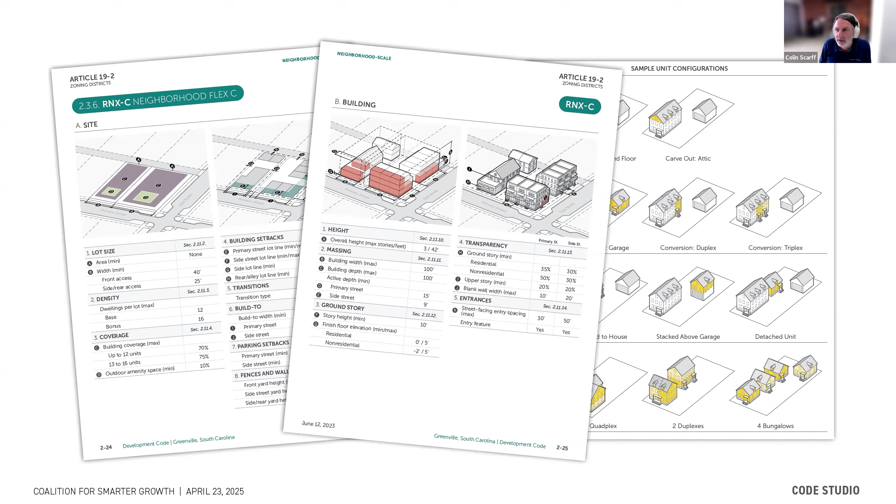So just a little bit about what we're going to talk about today. We're going to touch on what is a form-based code in today's world? Why do cities need better zoning? What is the right approach to zoning? And then after we've heard all this, where do we go from here? What are the next steps?

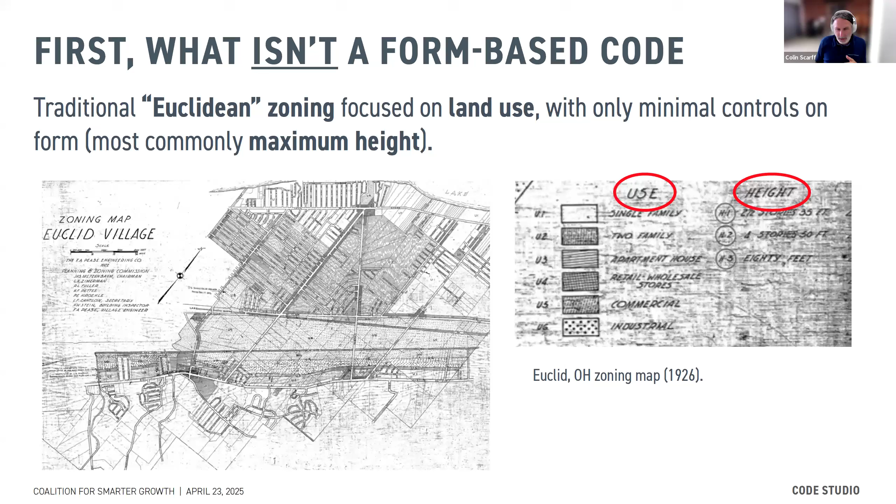So what is a form-based code in today's world? So, really, what isn't a form-based code, right? Traditional Euclidean zoning focused on land use, the separation of land uses, with really no or minimal controls on what we might call form, really focused on separating uses from one another. Did that work? Has that worked? I guess that's a debatable conversation.

I think you have these amorphous standards associated with Euclidean zoning, FAR, units per acre as it pertains to residential density. Parking requirements aren't very scientific. They're all intended to control negative impacts. But I think at times they've resulted in unintended and undesirable outcomes.

So what is the future of zoning? I think the separation of uses isn't working. Zoning hasn't focused enough on built outcomes. I think there's been a real push, maybe in the last 20 years or so, to move away from Euclidean-based zoning and focus more on built outcomes. And so more and more communities, more and more cities are looking for a different approach to zoning, one that regulates form and tries to restore traditional patterns of urbanism.

So, is it form-based code or is it just better zoning? I think that's the question that we've been asking ourselves over the years. Euclidean and form-based zoning are part of a spectrum with a wide range of possibilities in between.

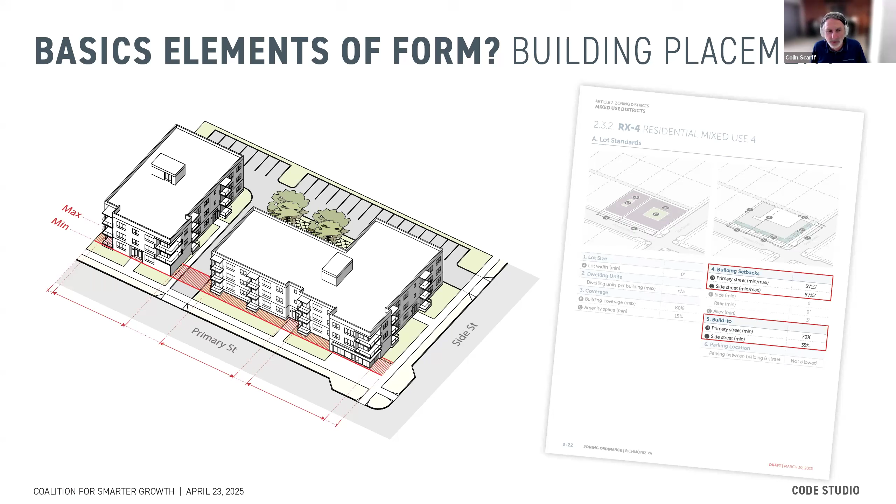And so just quickly, what are the basic elements of form that we should be looking at and regulating? Historically, we've had things like minimum setbacks, right? Where buildings are set back from the street. So one approach to form now is to have build-to lines to pull buildings up to the street, so that there's not parking between the building and the street.

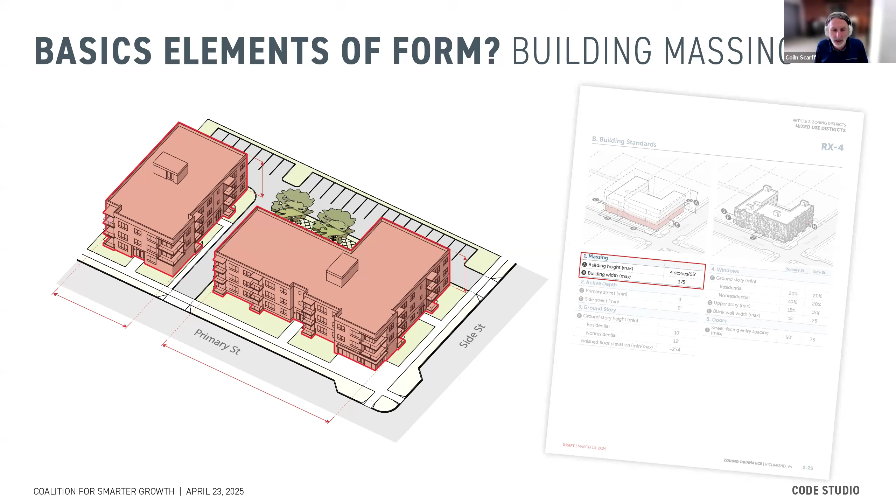We are looking at things like height of buildings, so vertical massing, and we are looking at horizontal massing, right? Because those are things that we might care about. How tall are buildings? How wide are buildings? Do they feel human scaled? Are they pedestrian oriented? Are things that we now care about.

So it's one thing to pull buildings up to the street, but what we've got to do when we're pulling buildings up to the street is we've got to make sure there's active facades up at the street, right? So we're regulating things like the minimum and maximum amount of transparency on building facades, making sure the floor heights are appropriate, making sure there's no large blank walls up at the street.

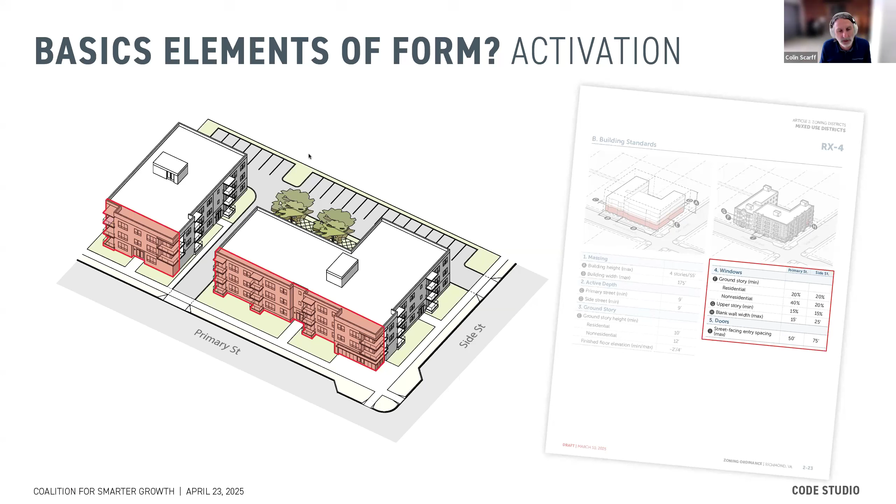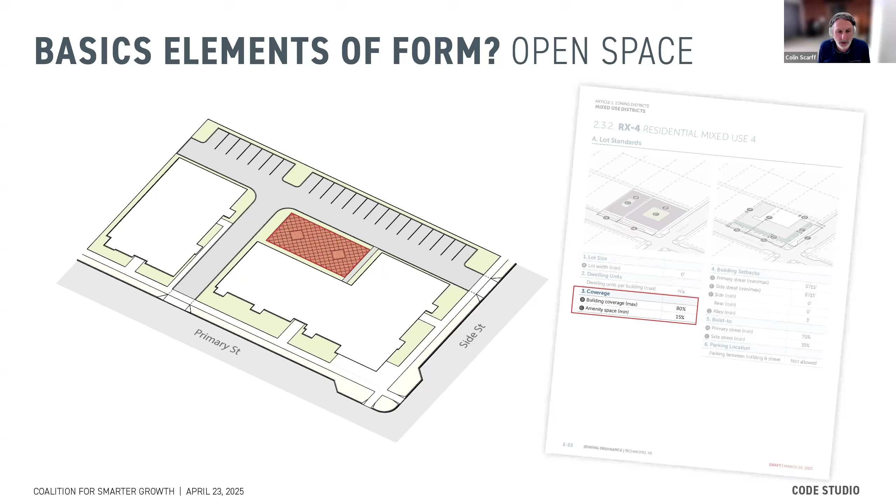And then most importantly, we're making sure there's building entrances up at the street. There's nothing worse than pulling buildings up to the street and then having no reason for anybody to be up at the street. So you've got to have those entrances and entrance spacing along the street front. And then making sure we've got open space, right? We've got to have outdoor areas for places for people to be, for people to congregate, to enjoy the outside air.

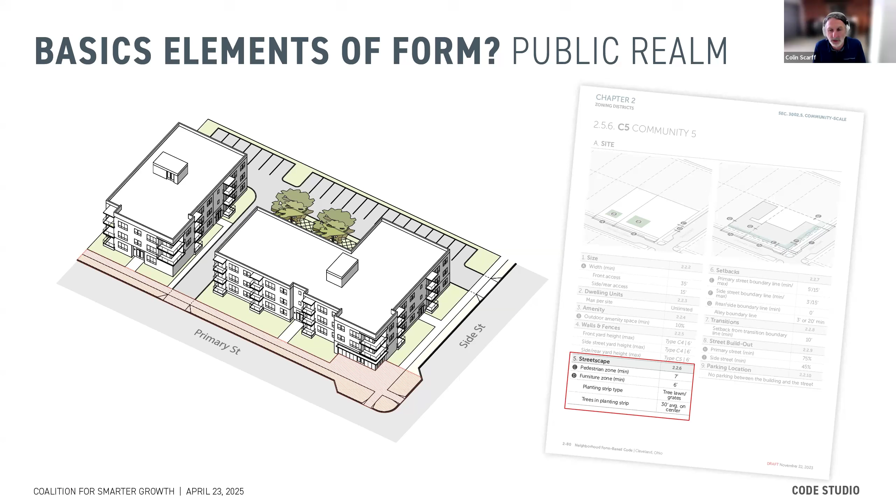And then this is kind of where the line gets blurred between zoning and form-based coding, is the public realm. Oftentimes we're looking just at zoning projects, which means we're really not looking on the public side of things. We are really focused on private property. And so trying to blur that line between the public and private, and at least making sure that you're getting appropriate streetscape requirements. So you're getting appropriate width sidewalks and appropriate width tree planting areas, and that you're getting trees between the buildings and the street to enhance that pedestrian environment.

And so why do our cities need better zoning? So I'm going to pass it over to Rene, and he's going to talk to you a little bit about this question number 2. Thanks, Colin. Next slide. So I'm going to talk to you about a couple of the big issues. These are not exhaustive, but just some of the main reasons why we need zoning and why zoning in some ways hasn't worked, and reasons why zoning could be better and how it could be better. So thinking about all those questions together.

And so, how did that happen? How did we, through all this sort of regulation and so forth that we have, produce outcomes that are this dissatisfactory? And so, thinking about some of that, badly crafted zoning is some of the reasons behind this. It's produced in a lot of places a poor quality of life in cities and suburbs and towns. And what are some of the things about that are bad? We touched on a few of them already. Rigid separation of uses through Euclidean zoning is a traditional thing that's been criticized for a long time, but still happens in a lot of places. And then aside from that, poorly regulated form. So either form not being regulated at all, or being regulated in ways that are negative in terms of the impact. Next slide.

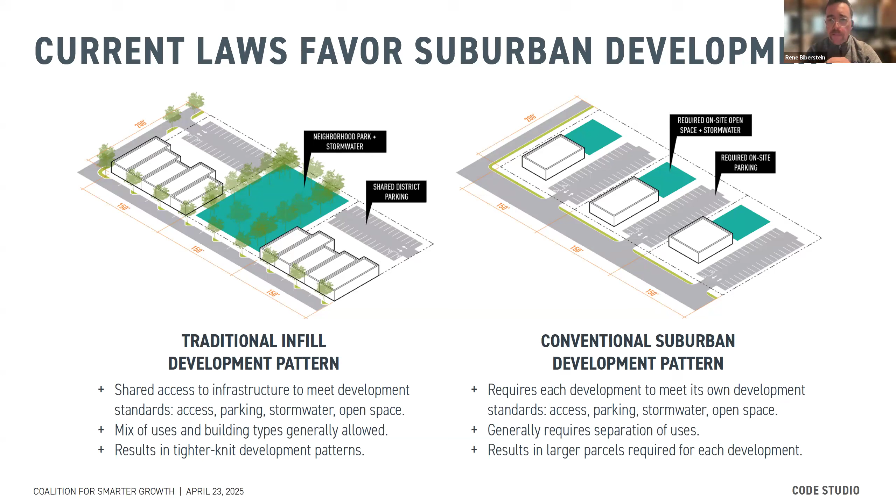So when you take the thing on the right and you try to impose it back on the left, it produces a really kind of a nasty mismatch. Next slide, please.

And another image is just having that happen in form. Left-hand side, a traditional pre-World War II development pattern of a main street, the more suburban development pattern. And then if you try to impose that suburban style of zoning on the urban area, you start getting a kind of a weird mismatch of things where you're effectively kind of forcing new development. When something gets replaced, where there's infill, you're forcing it to follow the suburban approach. Next slide.

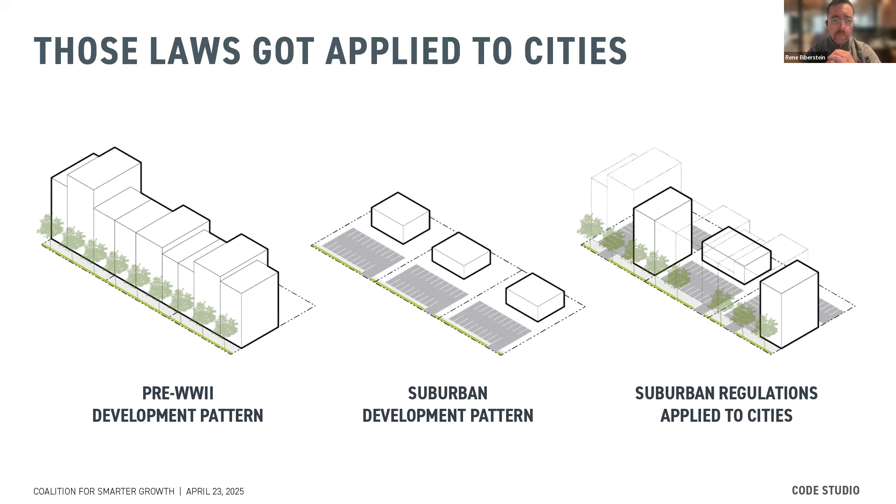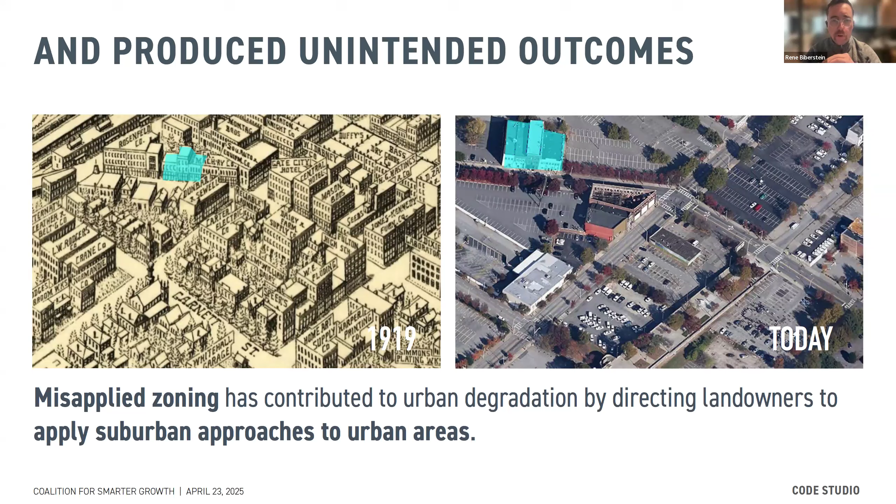And this is just an image that was taken from Atlanta, and pretty stark here: historic scene, huge amounts of density, all kinds of diversity of buildings. And then later on, today, lots and lots of surface parking. You can see just a little bit of that original form there. So this is partly a product, not only this, of other economic factors for sure, but partly a product of imposing suburban zoning onto urban areas. Next slide.

And so some of this results in a loss of housing diversity. So, new development is often out of character and reduces the diversity and affordability of housing stock. I'm going to talk more about affordability in a sec. Neighborhood serving businesses and buildings become quote unquote illegal or non-conforming under existing zoning. And a lot of parts of cities that we love effectively can't be rebuilt today. All this stuff is effectively non-conforming now. Next slide.

And so the question is, okay, going back to zoning again, we've sort of seen how zoning has harmed areas. Can better zoning improve my neighborhood? I think the answer is yes, but with some caveats: zoning can't force the market to build something it doesn't want to build. So it's not going to force people to build a certain thing, but a lot of development and a lot of what the market does follow a path of least resistance. So it's effectively kind of telling you, this is what we want as a base case.

Yes, you can apply for variances. Yes, there are sort of ways out of certain things, but here is the path of least resistance. Here's what we want. And if you do that, you're going to get your building approved quickly and simply. And so that's sort of the path that we want to put things on. We want to set up the default to be the best possible thing, rather than having the default being the worst possible thing or some sort of a substandard thing. So that's the path we want to set cities on in zoning. Next slide.

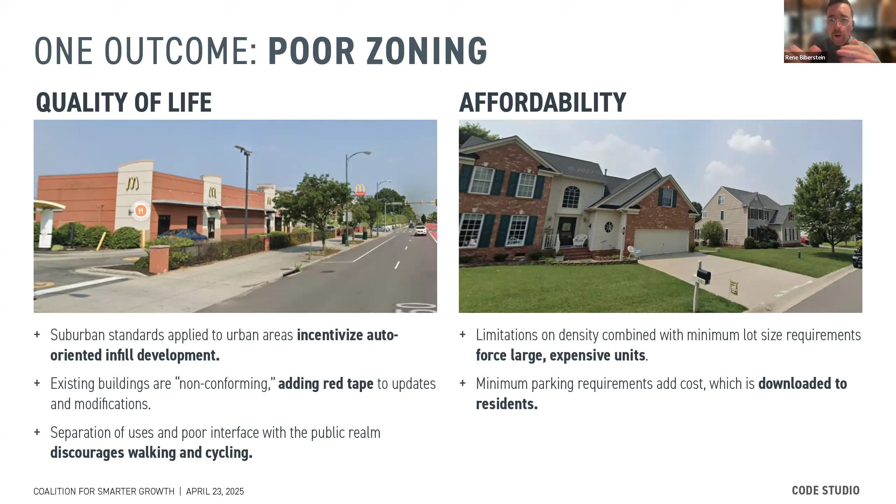Minimum parking requirements add cost, which is downloaded to residents as well. So in some cases, the market will want to provide a certain amount of parking. Other times, again, you're pushing it to provide more, and then that cost is ultimately being downloaded on consumers.

Next slide. The flip side of this is what we do want to achieve with zoning in terms of quality of life. Standards tuned to more traditional urban patterns, and we'll give you some examples of that later on, including lot sizes, setbacks, and mixes of uses.

So rather than imposing these suburban standards on them, we really study what those traditional urban patterns were, and we set that as the baseline. We encourage infill that matches those patterns by permitting it by right. And we try to transform suburban and auto-oriented areas by gradually applying more urban standards to them. So we're flipping what we talked about before on its head and trying to gradually urbanize some of those more suburban areas where we can.

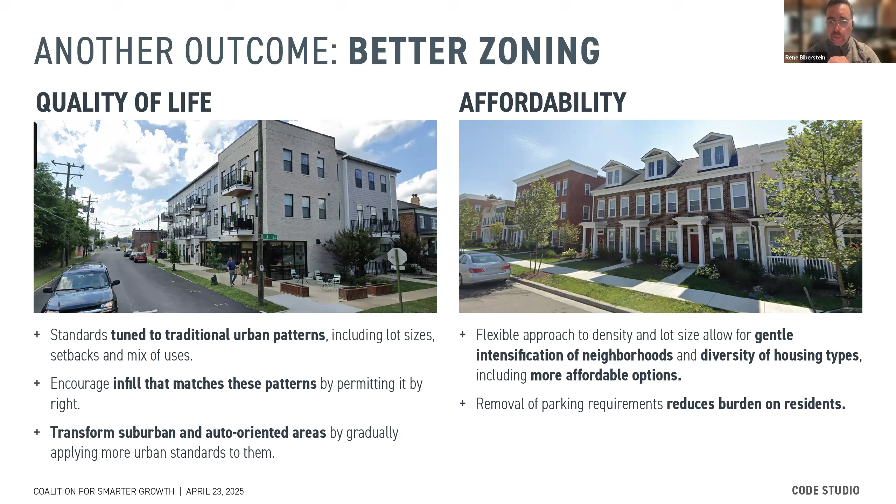In terms of affordability, a more flexible approach to density and lot size, allowing for gentle intensification of neighborhoods and more diversity of housing types, including more affordable options. So we're talking about ADUs, different types of smaller units, multi-unit buildings, townhouses, et cetera, and removal of things like parking requirements to reduce the burden on residents. Next slide. So I'm going to pass this back over to Colin.

Thanks, Rene. So we're just going to talk to you a little bit about some of the places that we worked in. I'm going to talk about some work we did in Charlottesville and Durham, and then I'm going to hand it back to Rene. He's going to talk to you about some of our ongoing work in Richmond. So just in terms of full disclosure, neither I nor Rene personally worked on the Charlottesville project. So if there are any questions associated with this project, we'll be happy to try and answer them, but we don't know the specific details of it.

But I wanted to share this project with you because it's a good example of a project where Code Studio got involved in the planning stage. So we were part of a multidisciplinary team. It was led by Rhodeside and Harwell, who are based there in Alexandria, who were doing the planning work. And they brought Code Studio on to help with the land use planning and ultimately the link from the land use plan to the zoning.

And so the interesting thing that happened in Charlottesville is that the conversation about changes of intensity, specifically focused in some of the existing single family neighborhoods, was had at the planning stage, which isn't typical. Usually, planning sets the stage for a more intense conversation during the zoning implementation work. I think Charlottesville decided to tackle these issues head on during the planning process when they put their future land use map together. And you'll see there's a very strong correlation ultimately between the land use plan map and the zoning map.

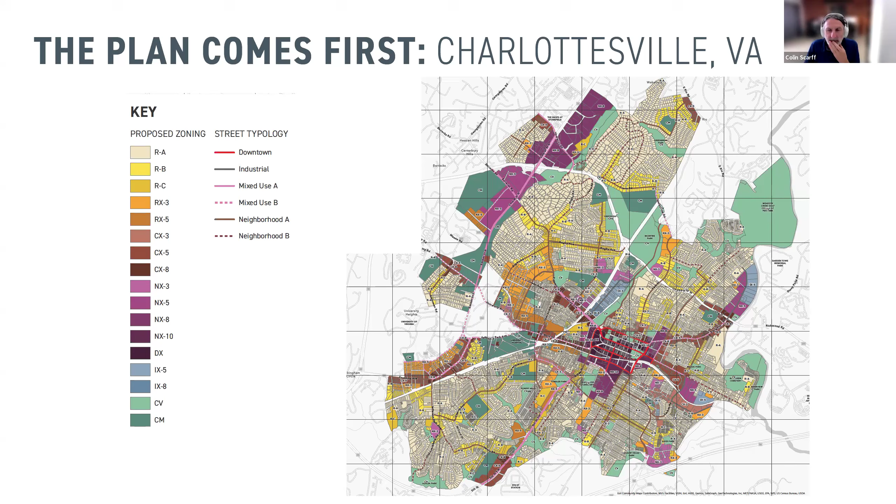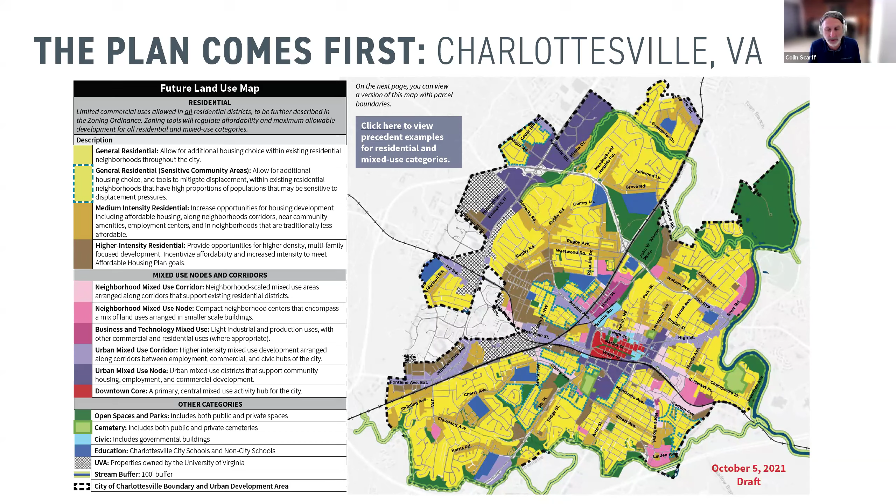And so with that, we put together the zoning map. I tried to line these up, but it doesn't line up perfectly. But you can see there's a pretty strong correlation between the land use categories and the zoning districts that came out of the land use plan. It's almost 1-to-1, which can make your plan challenging because you have to fight some of those harder battles when you're putting the plan together. But ultimately, that will make implementation through the zoning a little bit easier. It won't be completely easy, but it should make life a little bit easier.

And so ultimately, these are the zoning districts, at least at the lower intensity residential scale, that Charlottesville came up with. There's one district that allows up to 3 units on any existing lot. You can do 4 units if you keep the existing structure. And then if you meet some level of affordability, you are allowed to put 8 units on an existing lot. There were certain neighborhoods in town that didn't want that kind of density or intensity added to their neighborhood. They were concerned about displacement.

So there were certain neighborhoods that didn't get the same kind of intensity when it came to the allowed number of units in RA. So you could only get 1 unit, which is maintaining the single family character of the neighborhood. But if you were looking to put in deed restricted affordable units, you could put up to 6 units on that lot. Then they had an RB district and an RC district, which just gave you more intense units on existing lots for those particular zoning districts.

So, just touching on some work that we did in Durham. Durham recently passed their new comprehensive plan. I don't know, it was probably about 3 years ago at this point. We weren't involved with the comprehensive plan. We got brought on after the fact to kind of help implement the plan.

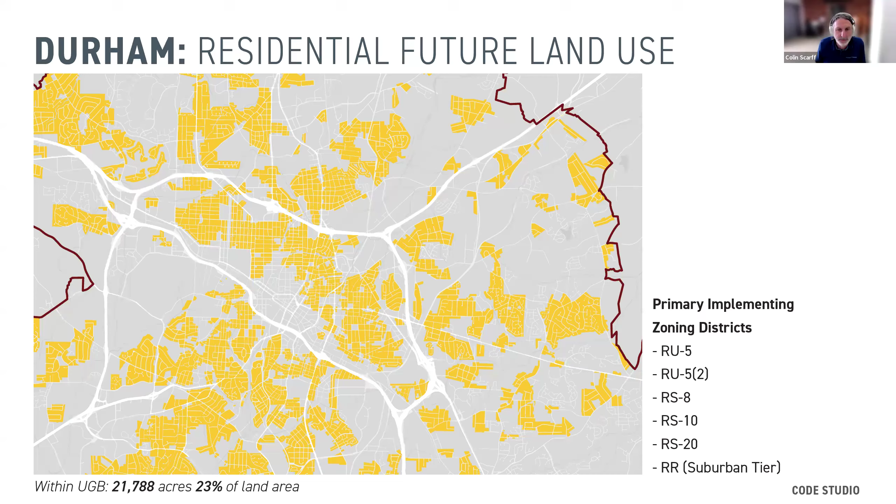And so we couldn't look at everything, but one of the things that Durham has is called its Expanded Housing Choice Program. It was a program that was put into place, I think, around 2019, 2020. And basically what that did would allow folks to subdivide down on an existing lot. I think you could go down to 2,000 square feet, but you had to limit the size of the unit that was built to 1,200 square feet to try and build in some natural affordability.

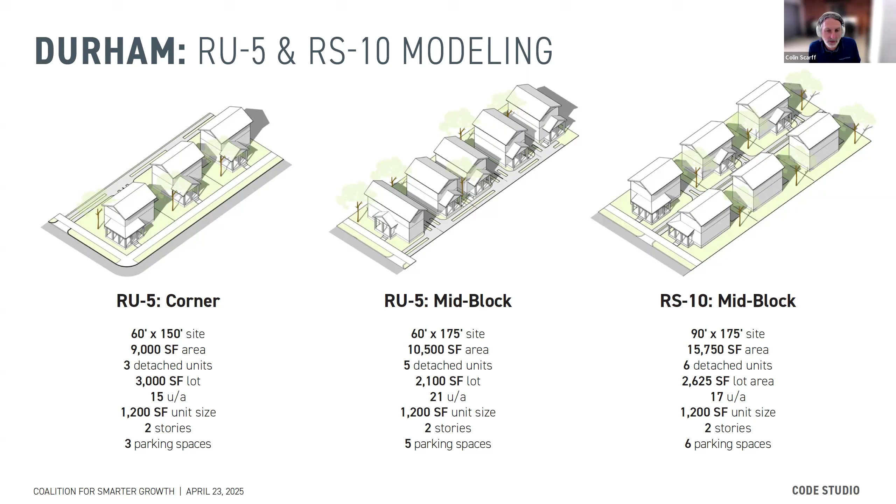So, one of the first things that we wanted to do was to try to understand that. So we did some high-level modeling just to see what kind of things we could generate using some of the existing regulations. And so we did run some high-level pro formas on these models, just so we could understand the economic outputs.

And so what we found when we looked at the for-sale products is that they were working really well. These units were selling for about $400,000 each, which isn't affordable by any means, but on the market rate side of things, a little bit more achievable. So these units were selling at about 98% of AMI, and they were showing up in neighborhoods where houses were selling around them for $800,000 to $1 million. So this was a model that was working from a for-sale pro forma perspective.

So when we tried to run the pro forma on a rental per month perspective, the numbers weren't the same. Things were working out from a for-sale perspective, but from a rental perspective, the numbers weren't working, right? So we were coming in with rentals that were significantly over the AMI for the area. As much as $3,000 a month, which is a lot of money for folks to afford. So we wanted to understand, well, why was that happening?

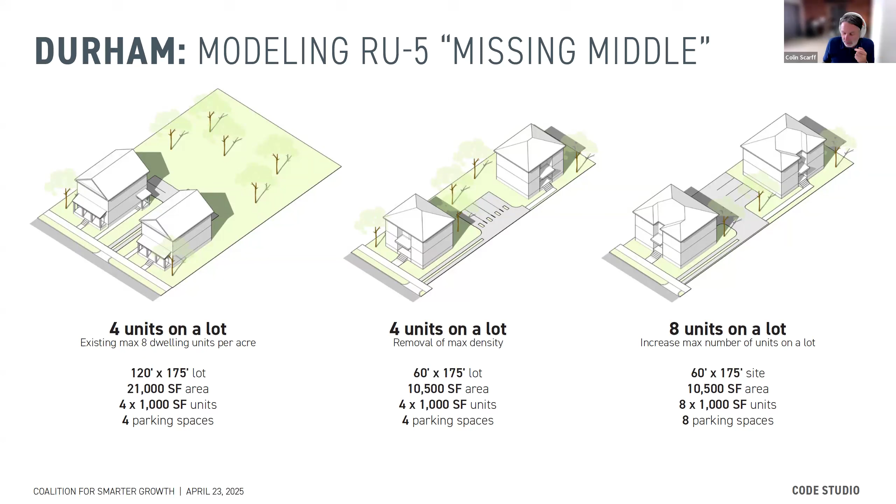So we wanted to look at things like, what would happen if you removed the maximum density completely? What would that look like financially? And then what happens if you double the density, for example? What would that look like from a pro forma perspective? And so what we found was pretty eye-opening and really helped us inform some of the zoning changes that we came up with moving forward.

So this is the no change scenario. We're looking at an average monthly rent of about $3,500. So when we modified the density and reduced the lot size down significantly, you can see that the numbers start to reduce. Just by making that one change, we've reduced the rent down to $2,800 a month. And then we've allowed more than 4 units, right? So we wanted to see what would happen if you put 8 units on that same lot, and you'll see that the numbers are coming down. And then we were using 1,000 square feet for the unit size.

So what would happen if we dropped the unit size down to 800 square feet? And you'll see that the average monthly rent is coming down to about $2,000 a month. And then Durham doesn't have a parking requirement, but we were assuming just kind of market rate, 1 space per unit. So we just wanted to see what would happen if you dropped the parking ratio down to 0.5 spaces per unit. And you'll see that brought the rent down a little bit, but not much.

And so what this helped us do was make sure that we were putting together the right metrics for the new zoning as part of the plan implementation work, based on kind of pro forma economic modeling. And so we didn't have the capacity really to do any kind of economic modeling on some of their multifamily districts, but we did want to help them understand what the impact was with some of their existing requirements associated with their current zoning districts.

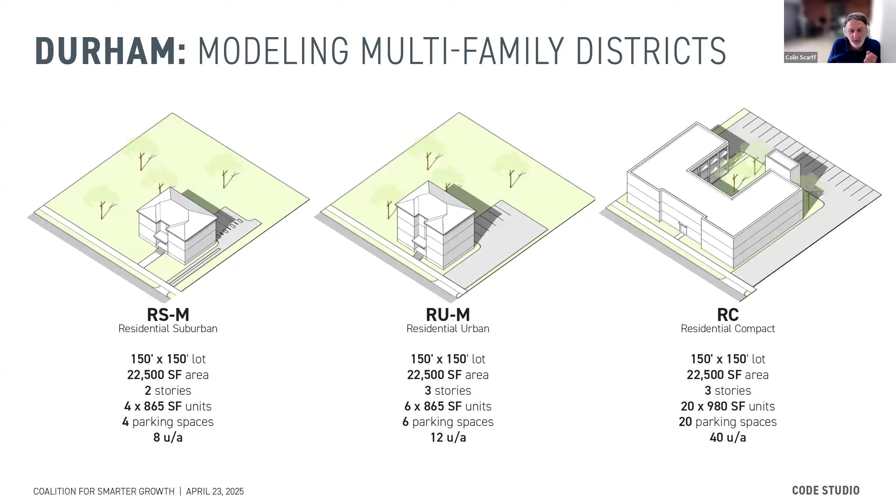So we just wanted to show them specifically, you know, what could you do if you removed the maximum density requirements, for example. So the same size site, we were generating 4 units. We're suggesting that you could get 32 units and still provide parking. Where you were getting 6 units in RU-M, if you remove the maximum density requirements, you could get up to 54 units on that same amount of land, and so forth. So this again helped us fine tune the new zoning standards moving forward.

And I'll just pass it over to Rene real quick to talk to you about some of our work in Richmond. Yeah, so we're currently working on the Richmond comprehensive zoning code. We're about halfway through it, so it's a work in progress. But I think that a bit like Charlottesville, it started from a really good point. They had a plan that was produced in 2020 called Richmond 300.

We weren't involved with that plan, but it did do a pretty good job in terms of talking a lot about built form and setting out an approach to built form that guided a lot of the work that we did. So effectively, it allowed them to have that conversation as part of the planning process with the general public, got people comfortable with it, got to hear feedback in terms of what people wanted for their neighborhoods and for different parts of the city, and bake that into the plan from the start. So when the plan came to implementation through zoning, it set up a really clear course of action for us to take the work they've done and try to translate it into zoning.

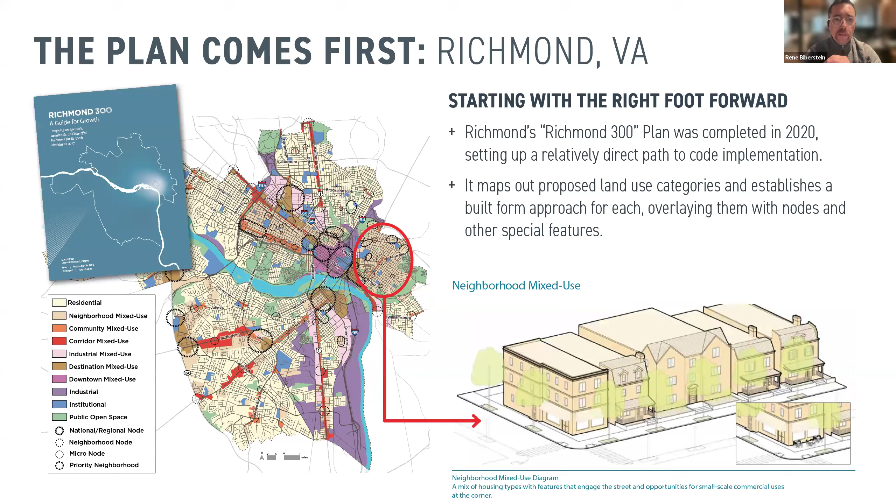And the other thing that's interesting about Richmond is that Richmond has a lot of traditional neighborhoods built before the Second World War. As I was saying before, it had the problem of zoning being imposed onto these areas that was a mismatch with what was there. And so a lot of these areas were effectively underzoned, or they had suburban style zoning applied to them, and that resulted in huge numbers of nonconformities, which basically meant that, let's say you wanted to replace a building that was there or fill in an empty lot.

Even if you wanted to build something that was exactly like all your neighbors, you would have to get a special permission to do that because all those other buildings around you were non-conforming. And so they have this kind of Byzantine process of allowing special use permits, or SUPs, to make exceptions to the zoning. It's kind of a get out of jail free card that you can get if you're approved, but it's a cumbersome process to go through.

So in order to understand what those real patterns were, given they weren't being reflected in the existing zoning, we had a sub-consultant firm on our team called Utile, an architecture firm out of Boston, that went back and studied some of these neighborhoods and produced what the city called a pattern book. Not necessarily the traditional definition of the term pattern book, but effectively a study on the metrics that define those traditional neighborhoods. Next slide.

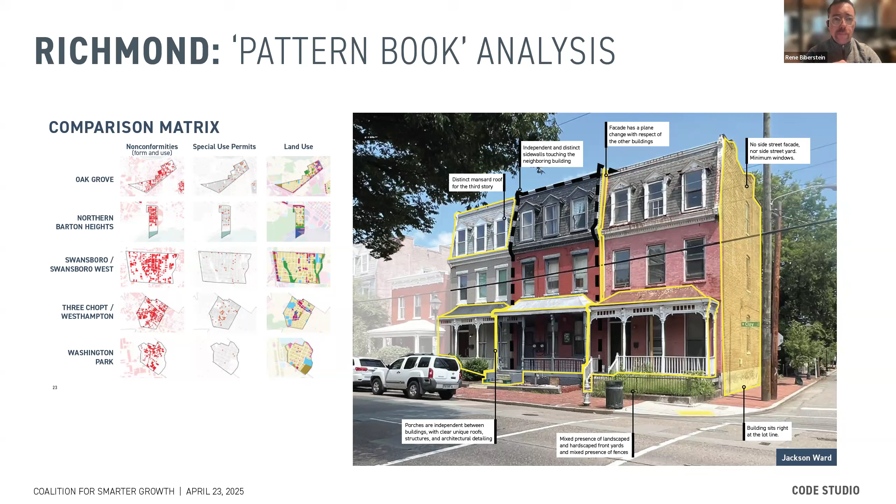So in some of the more basic ones, like industrial or institutional or open space, it's almost a one-for-one. And then for some of the other ones that are mixed use, there's a bit more mixing of these. So we effectively reuse some of the same districts in more than one land use. But there is a relationship, and the guidance that they had in the plan was a good start for us. Next slide.

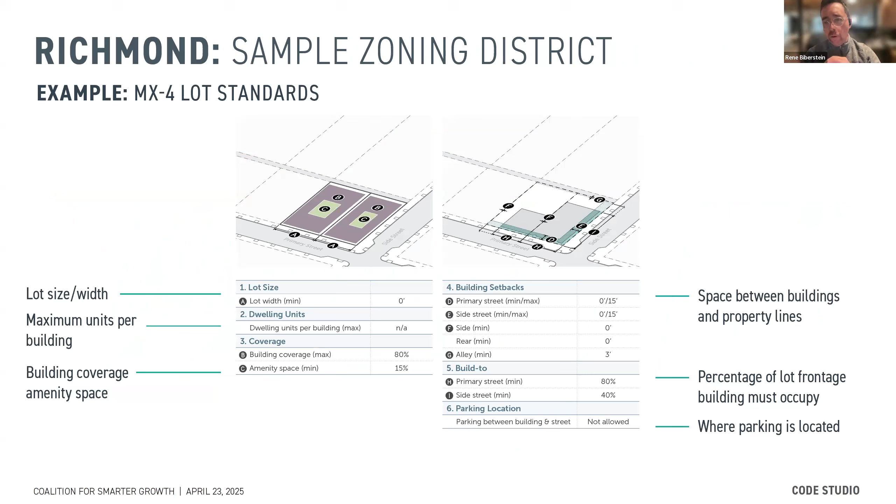And so I won't talk through all these, but these are some of the districts that we're producing out of this. Again, they're still in draft format right now, but some of the standards that we're looking at, this is just an example from MX4, which is a mixed use district, 4 stories maximum height. So standards around lot size and building standards. Next slide.

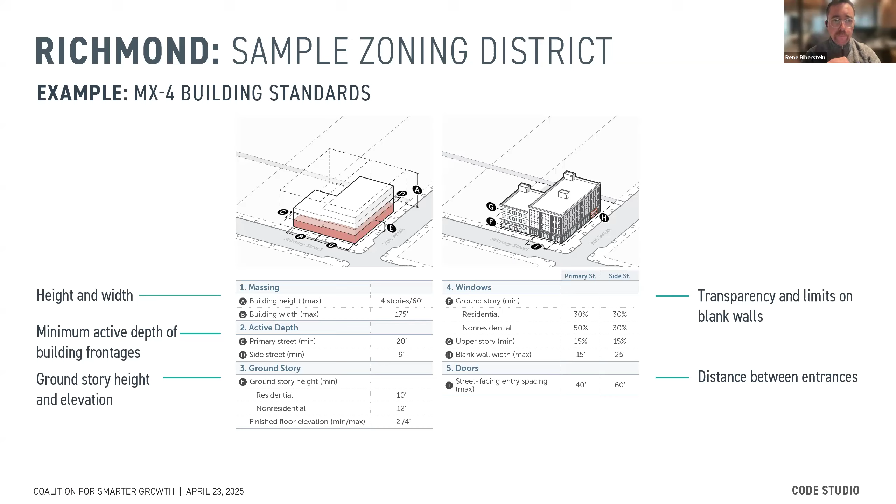So in conclusion, ultimately we want to try and use plans to set up a vision. Plans play a really important role in getting you to good zoning, and they can take you a lot of that way. So again, setting out land uses, setting out higher level approaches to built form, they get implemented through zoning. When you do all that heavy lifting from the beginning, it makes the second part of it much easier.

Oftentimes we are working in places that have much older plans that are out of date and we're trying to interpret them. It's difficult to do that. And probably the worst thing is where you're trying to actually do planning effectively through zoning, where you have a plan that's effectively completely out of date and you're trying to make decisions around planning from scratch in the zoning process.

We like it a lot when we have the foundation of a plan to build on and to effectively implement through zoning. So some of the different things that come out of planning: the subdivision code, the zoning code, all kinds of other types of ordinances and regulations. But we want to see those things created or founded through the planning process. Next slide.

So important things to think about here: getting the basics right for regulations, common sense, predictable requirements, and clear, predictable processes. So we spend a lot of our time not only thinking about zones, but also thinking about processes. So making sure that approvals are smooth, there aren't all kinds of different diversions and exceptions that you have to go through. That when you're doing the sort of thing that's actually conceived from the beginning in terms of the intents of the plan and the zoning code, you can get through the process quickly and transparently. Next slide.

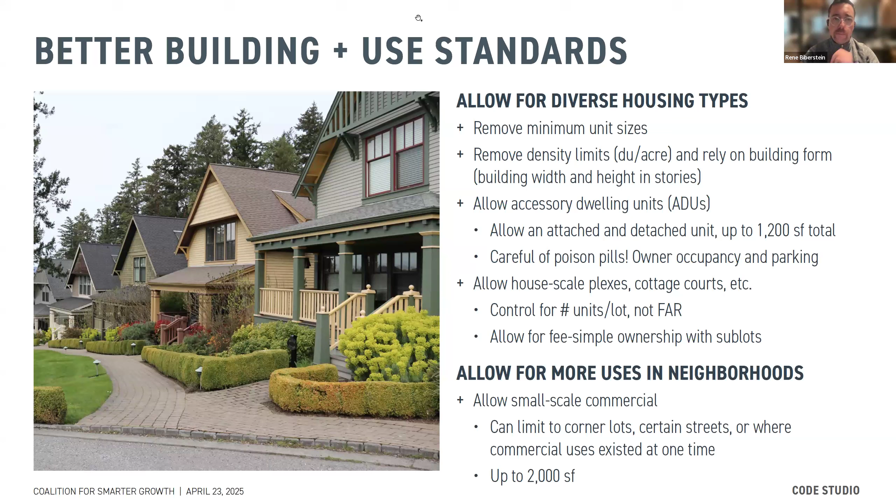At the same time, reducing or removing minimum lot sizes. Again, thinking about other alternatives that we can use that focus more on built form and allow for more flexibility. Allowing for better use of lots, so reducing side and rear setbacks for house scale buildings, reducing or removing parking minimums, reducing transitional yards between residential and small scale commercial uses, and working with stormwater and fire code officials to develop strategies for small projects. Next slide.

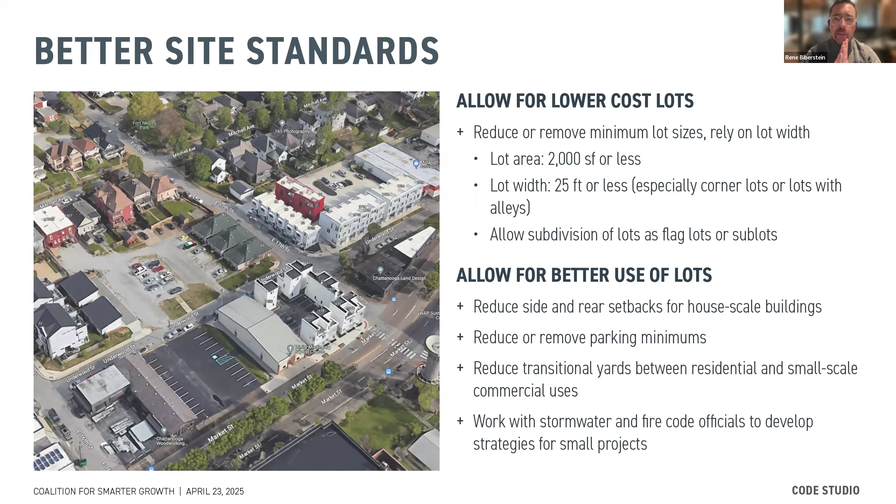And so just, again, better zoning documents, clear, predictable, transparent. We love using graphics. You've seen some of our graphics already in this presentation. I think that's a direction that zoning codes have been going in for quite a while. If you look back at older zoning codes, they're like all text legal documents. We want to produce something that's easily accessible and that any member of the public can pick up and understand and visualize what's intended. So graphics, things like tables.

Now there's still a back end that explains all the legal considerations and is just as precise as any other text document. But we want to make it easy for the member of the public to flip to exactly where we are and quickly see the main metrics around what the zoning is going to say about your property. And then when you have to go back and find an explanation, you can flip back to something again that has graphics and is easily understood, and then simple language and clear intent.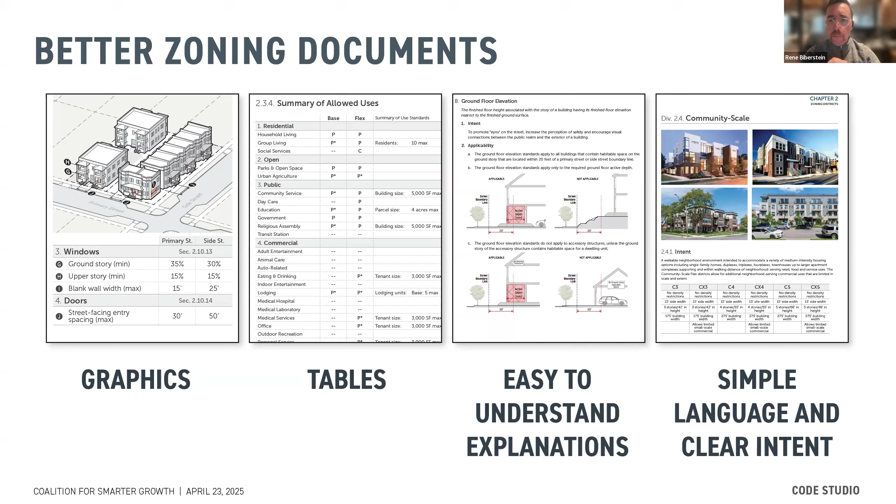So for every one of these zoning districts, we always want to include an intent statement that says, what are we trying to get to with the zoning district? Why is it there? What's the goal? And again, language that's easy for people to understand. You don't have to be a lawyer to read the zoning code. Next slide.

So where do we go from here? And this is just going to be really quick, and happy to talk about this more afterwards. But so you've decided that you want to have better zoning. What's the next steps? So first of all, because we think this ideally should happen all the way back at the planning stage, we think it's important that you get to know your elected officials as a member of the community, that you share your support for change, that maybe you run for office yourself, who knows, but you advocate for that change from the very beginning.

You show up to local community meetings and you advocate for incremental improvements to zoning where that's possible. So if we're not considering necessarily an overhaul of the zoning, what are the ways that we can incrementally improve it? And I think there's a lot of opportunity for that. Like I said, there's a whole spectrum of different possibilities. It's not black or white, all or nothing. There's a lot of incremental improvements that can be made.

And then when we come to planning, we push for plans that are form focused, set the stage for better comprehensive zoning, that again are graphic, that talk about form, talk about density and diversity and all those sorts of things. And then finally, when the zoning is being updated itself, you should get involved as a member of an organization, of course, but even just as a member of the public. Roll up your sleeves and get involved. Don't be afraid to push the envelope, show up for community meetings and make your voice heard.

Oftentimes the process is contentious in terms of input we get from the public, but we actually enjoy hearing all this sort of stuff as zoning consultants. And the more information, the better.